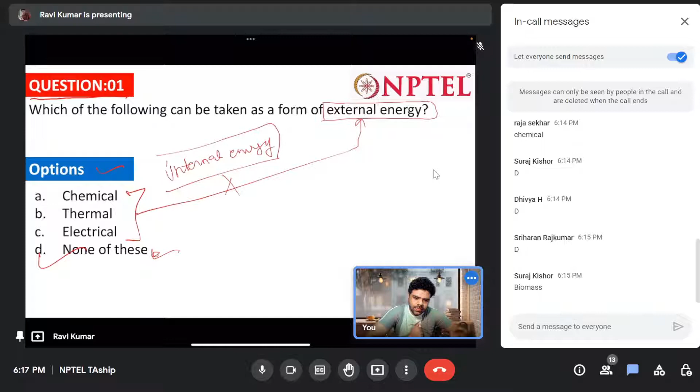Biomass. It's fine, Suraj, but biomass is not the answer. That means you have not gone through the lectures.

This is a chart: energy stored in matter. So the energy which is transferred by work action is known as external energy, and that is kinetic energy and potential energy. While on the other hand, the energy which is transferred by work, heat, or convection, that energy is known as internal energy.

And the examples of internal energy are chemical, nuclear, electrical, magnetic, internal mechanical, or thermal and bond energy. So the examples of external energy will be potential energy or kinetic energy. So the answer of this question will be D, because neither of these are examples of external energy. I think it is fine now.

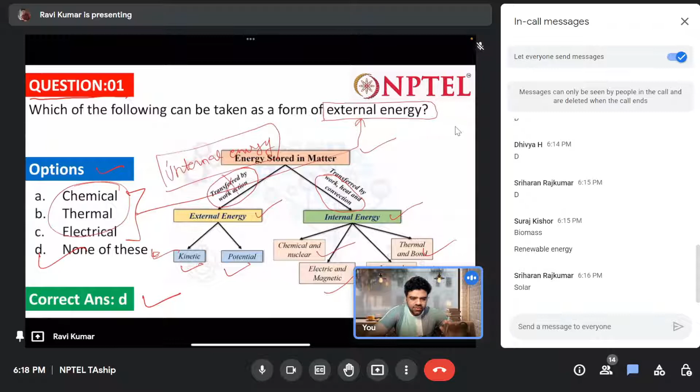This is from the week 5 lecture 1 only.

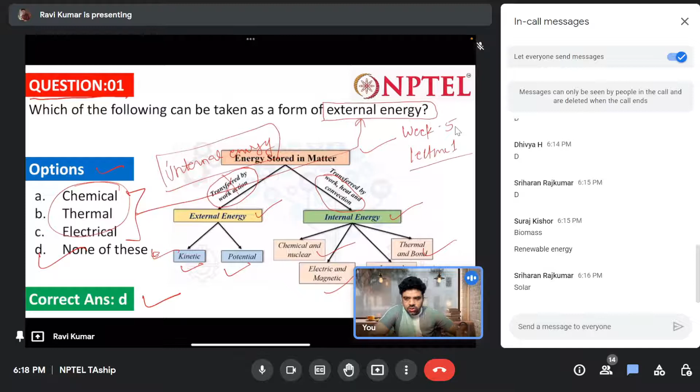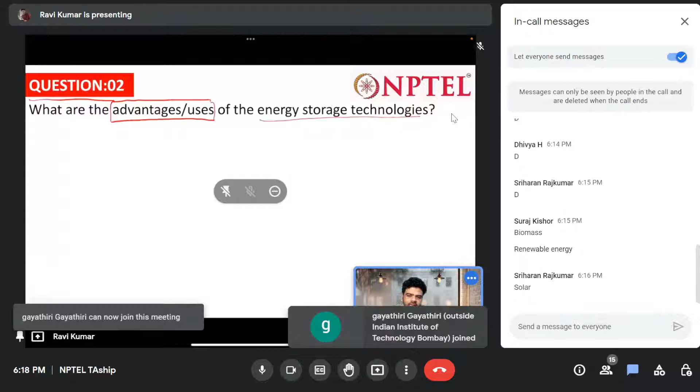So let's move to the next question. So the second question says, what are the advantages or uses of energy storage technology? You just need to tell me the advantages of energy storage technologies. These are the options: first says ensuring continuity, second says mobile technologies, third says off-grid application, and fourth option says all of the above.

I am asking advantages of energy storage technologies. Suraj says all of the above, great. Deepa says D too. Okay, the answer is all of the above.

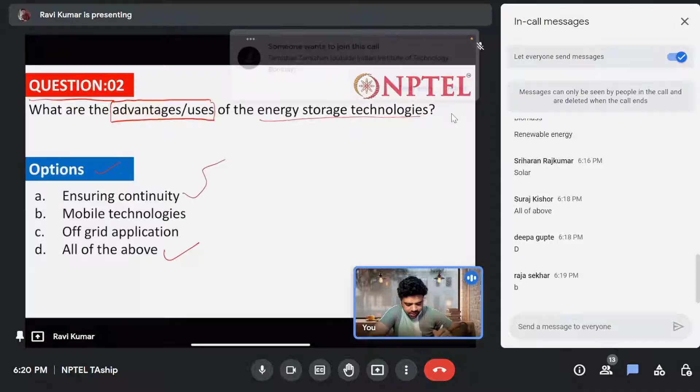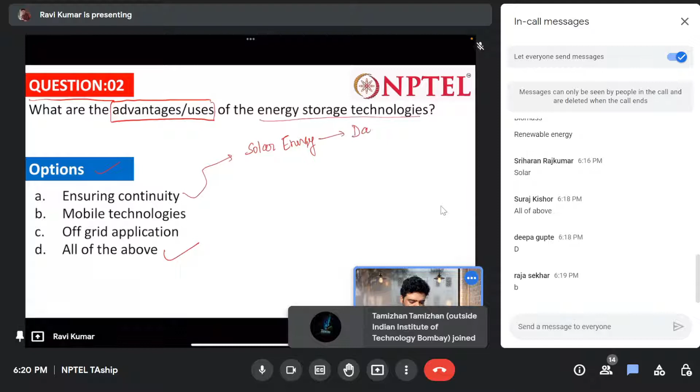But how? Let's see. Ensuring continuity: if we have solar energy, we will get it in the daytime only. So for continuity, to be used in the evening or night, what do we need? Storage. What do we do generally? We store it in batteries. So the first advantage of energy storage technology will be ensuring continuity.

Second says mobile technologies. I think you must have mobiles, laptops, wearables, watches. So these all are running on batteries. So battery is an example of energy storage technology, so yes, second option is also correct.

Third option says off-grid applications, meaning it is working even when grid is not available. Off-grid application like electric vehicle, EV. We are not connecting the wire to the electricity pole, so it is off-grid. Yes, then option C is also correct.

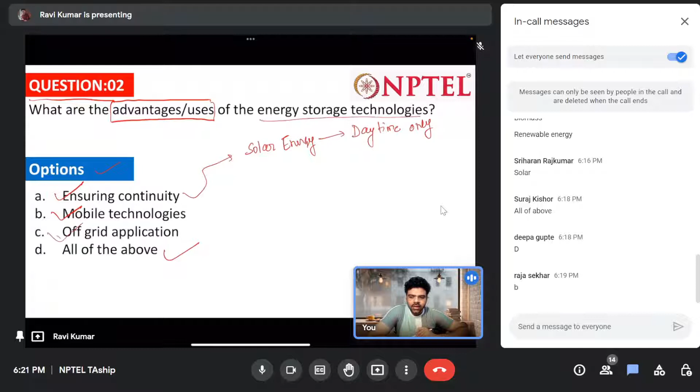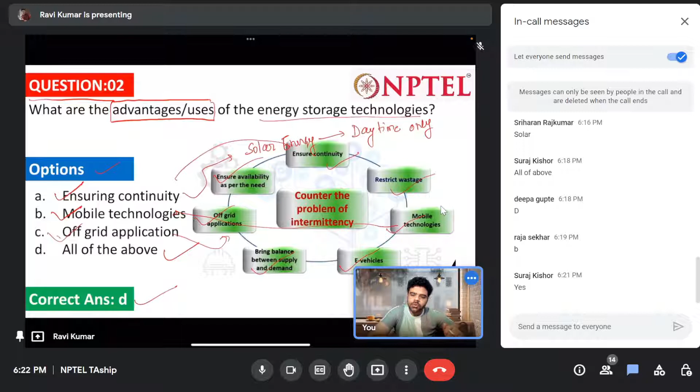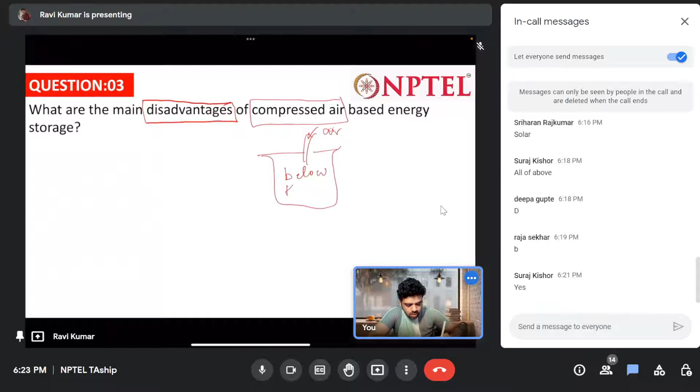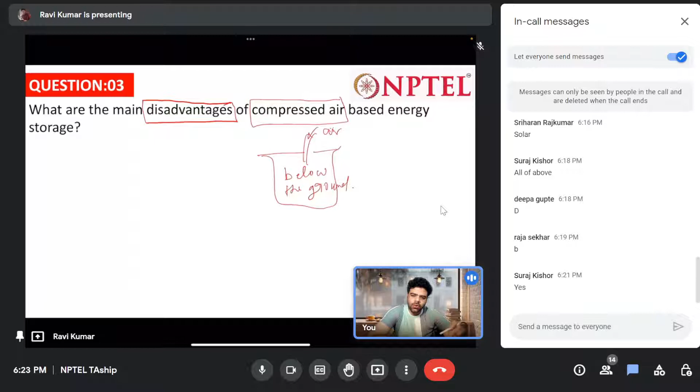That says, what are the main disadvantages of compressed air based energy storage? So first let me tell you, compressed air is a way of storing energy. What we do, we just store compressed air below the ground. So this is a way of storing energy. You just need to tell me the disadvantages due to this kind of storage technology.

These are the options in front of you. First says contamination of water. Second says storing of small amount of energy. Third says requirement of special geological formation. And D, last option, says high maintenance cost.

What are the disadvantages of using compressed air as a method for energy storage? Kishore is saying option C. Okay, here it may be two options which are correct. So Suraj is saying C. C is absolutely correct. Fatima is right, Suraj saying A, contamination of water. Absolutely correct, because we are storing this energy below the ground, so there will be groundwater, and heating of groundwater is also a kind of contamination of water.

Because if air will be compressed, it will generate heat, so contamination of water will take place, and also requirement for special geological formation. Why? Because if we are compressing air here and it is producing heat, here it may be coal present, and this coal may be burned due to this heat. That's why requirement of special geological formation is necessary. This is from the lecture only. Disadvantages: contamination of water, spontaneous combustion of coal. So yes, A and C are the correct answer.

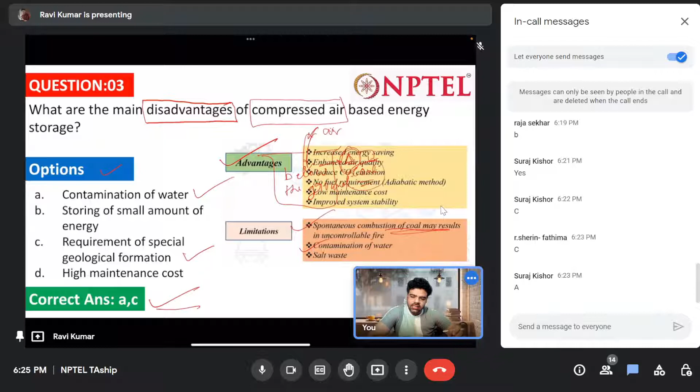Okay, let's move to the next question. That says, flywheel for energy storage generally spins at. Do you know what is a flywheel?

Anybody? Do you know? Yes, no, maybe, may not. Okay let me tell you, flywheel is a way of energy storing technology. What we do, like this is a box here, and here is a wheel of higher mass, and this is a shaft, and inside this box is vacuum.

So what we are doing, if we have some kind of energy, like electricity is there, solar PV is producing electricity, what we will do, we will just attach a motor or generator. So during the daytime, or during excess energy production, this motor will rotate this flywheel. And due to vacuum here, it won't stop due to friction or any kind of resistance, because there is no air, so it will continue in motion.

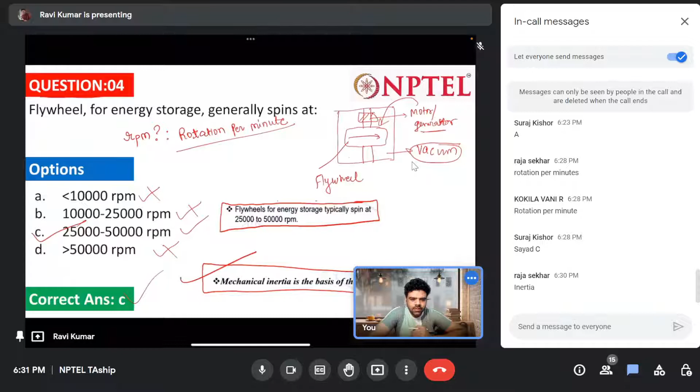I think inertia everyone knows. Okay, it's clear. Let's move to the next question.

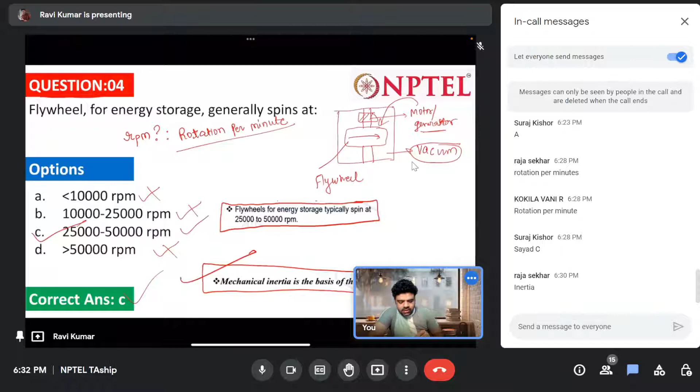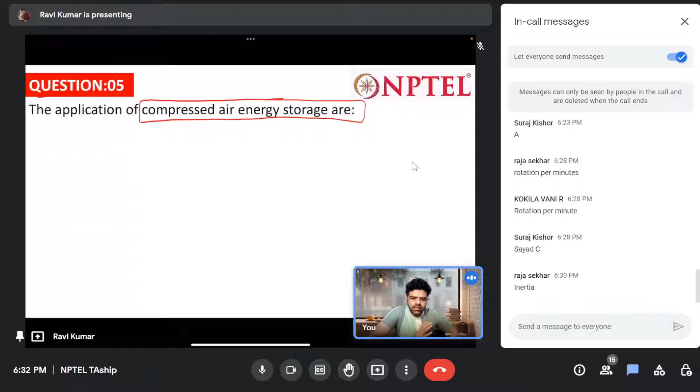So it says the application of compressed air energy storage, which I told you before, 2 slides only. What is this compressed air energy storage system? You just need to tell me the application. These are the options where this compressed air energy storage system can be used. Can it be used in power generation? Yes or no?

Suraj is saying A and B. What about others? Okay, I am assuming Suraj is right. Then tell me why not C?

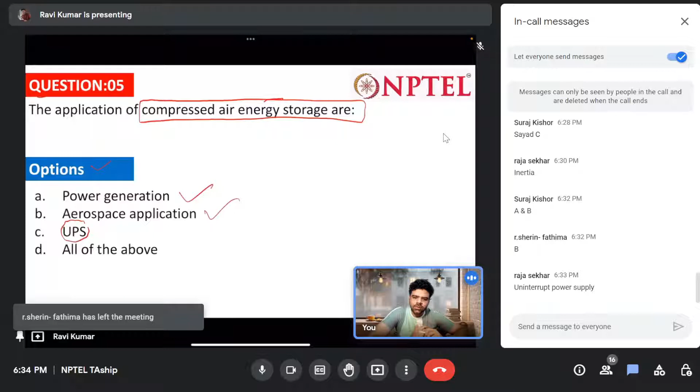But why can't we use compressed air energy storage for UPS purpose? Because switching time. Switching time for this technology is more, and in case of UPS, it should be in milliseconds. I think now everything is clear. Why not UPS? Yes, the answer will be A and B, both: aerospace and power generation.

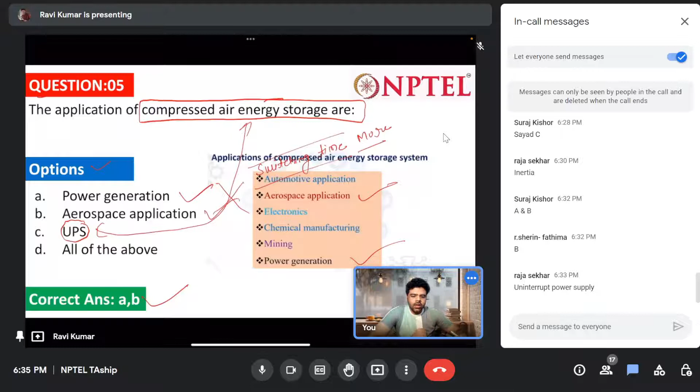Okay, let's move to the next question. Which of the following has highest round trip efficiency? Highest round trip efficiency.

What is round trip efficiency? See, if I am asking some question, and if some word is there in the question and you don't know the meaning, then you can't answer it. So if you are not understanding the question, you can ask. I will tell you.

See, I'm telling you one thing. Let's assume this is an energy storage device and we are storing energy P input, and after some time we are using this energy as P output. This is our storage. So here efficiency will be, round trip efficiency will be P out divided by P in. I think now it is fine.

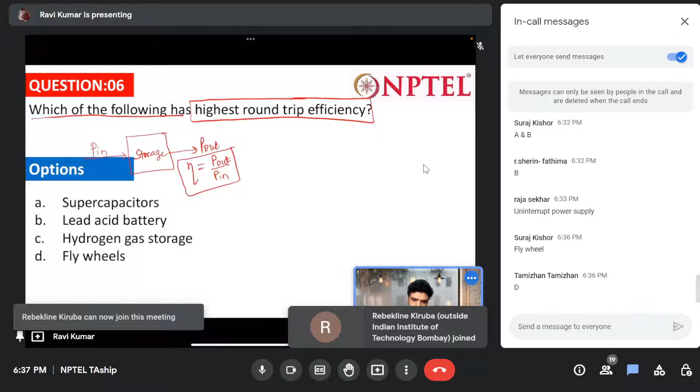Suraj saying flywheel. Tamizhan saying flywheel. Okay, so two students are saying flywheels. Raja is saying lead acid battery. One student is saying lead acid battery.

What about others? Pavan Krishna saying C, hydrogen gas storage. Okay. Shalini going with D. Deepa going with C. Fatima is also with C. It's going to be very interesting. One more for C.

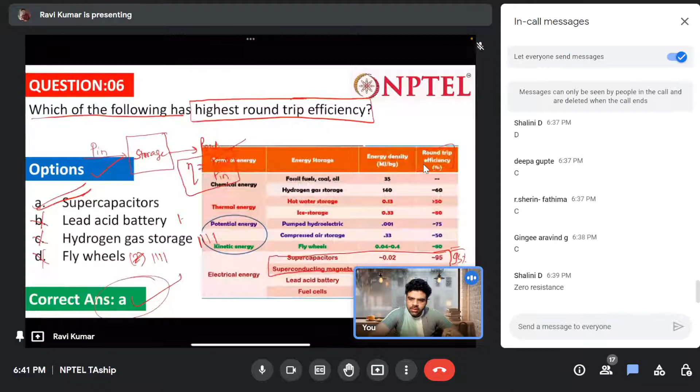Let's move to the next question. Find the amount of illumination in 1.5 sun. This illumination unit is kilowatt per meter square. So options are 0.5 kilowatt, 1 kilowatt, 1.5 or 3. You just need to tell me the amount of illumination in 1.5 sun. A, B, C or D?

Okay, two students, Pavan and Arvind ji, saying option A, 0.5. Gayatri is saying option C. Tamizhan, option A.

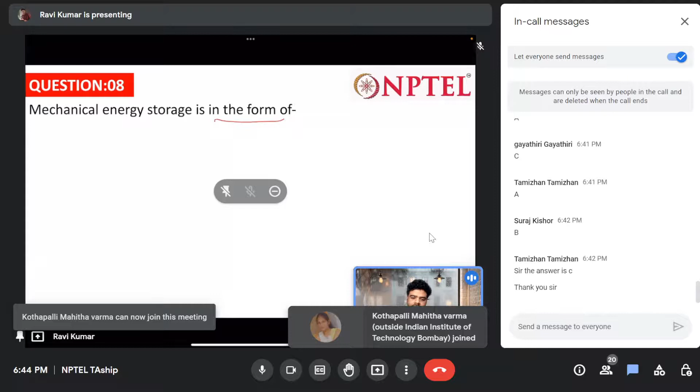So let's move to the next question, which says mechanical energy storage is in the form of: the mechanical storage is in the form of kinetic energy only, potential energy only, both, or none.

Arvind says C. Yes, Arvind, you are right. The option is C. Yes, Gayatri, answer is right. C. Mechanical will have both kinds of energy, kinetic plus potential.

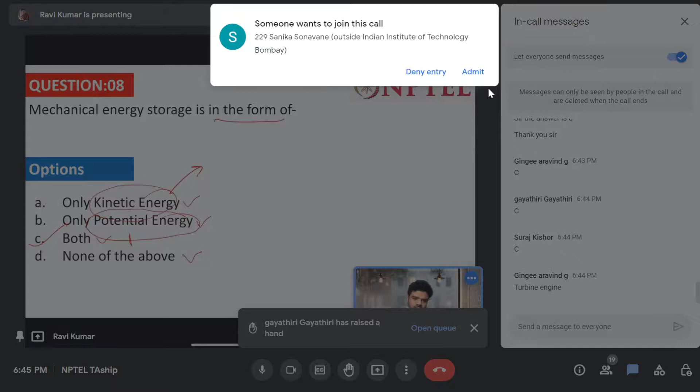Okay, so for this kinetic energy, you have seen an example. What is that? Name it. We were discussing just a few minutes ago. Turbine engine. Turbine engine is energy storage technology. Really? What is this turbine engine? What do you want to say? It's kinetic potential. Yes, Gayatri, flywheel. Flywheel is a kind of technology.

And for this potential energy, it's something related to, like Arvind is saying, turbine engine. It's kind of hydropower. Like, if this is a height h, and there is some water here, and this is a reservoir at a height h, what we will do is pump this water up to some height, so it will have some kind of potential energy, mgh. So what we have done is stored electricity in the form of potential energy. So potential energy is a form of mechanical energy. So after the unavailability of this electricity, what we can do is just open this reservoir, and here we will use our generator, and it will generate electricity back.

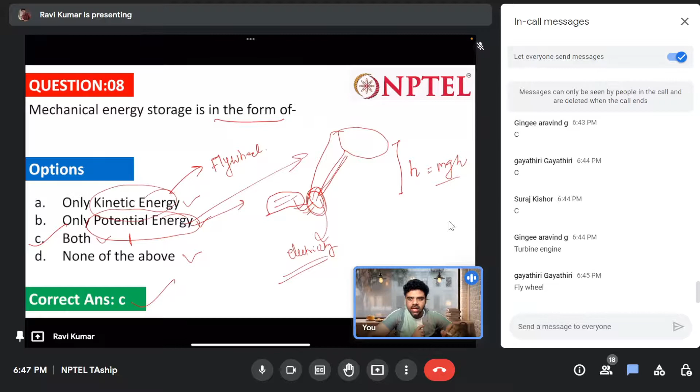Let's move to the next question, which is the second last question for today, and this one is very easy. You just need to match these: isothermal process will have constant volume, pressure, or temperature. What about adiabatic, isobaric, isochoric? It's very easy.

Kokila is saying constant temperature is isothermal. Isothermal is constant temperature, yes, so according to her, A is third. Constant pressure is isobaric, so C goes to second.

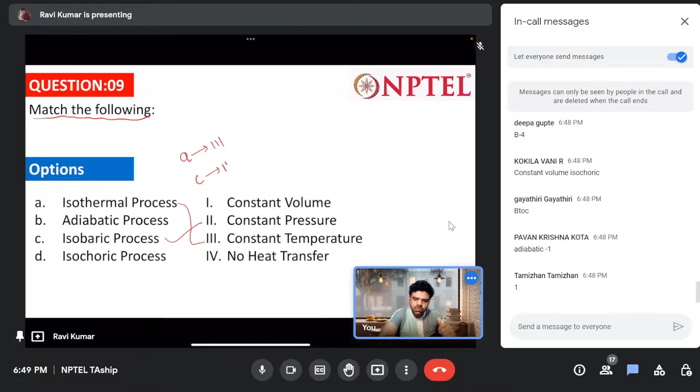What about isochoric? D, V, adiabatic 1. No, what is this 1? I'm not understanding. Tamizhan is saying only 1. So is this 1 for isochoric or adiabatic? Adiabatic means no heat transfer, yes. So B goes to the 4th and D to the first, D is constant volume, yes.

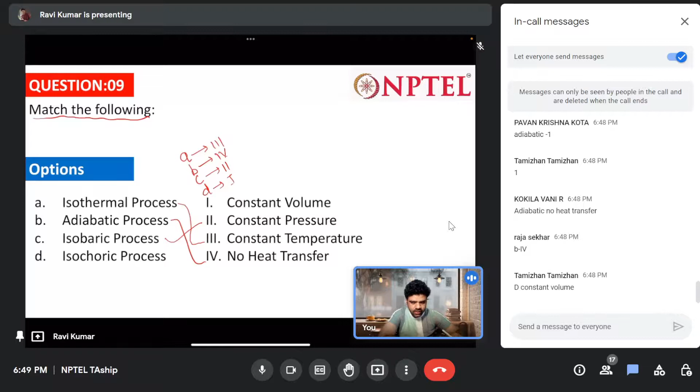So I think we have done all 4. Here also you can see isobaric, isochoric, isothermal, adiabatic. Pressure is constant for isobaric, volume is constant for isochoric, temperature is constant for isothermal, and for adiabatic there is no heat transfer.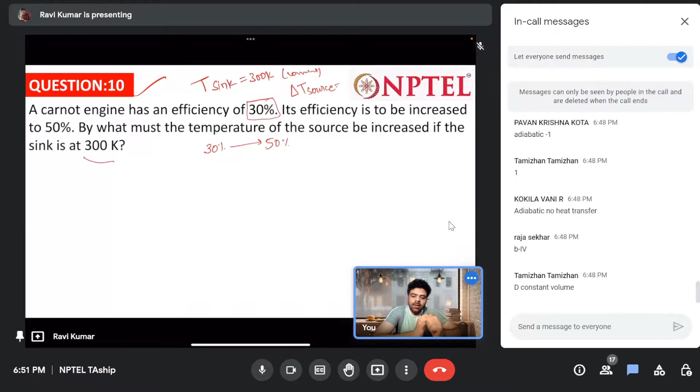If not understood, let me know. In simple language: if a Carnot engine was having 30% efficiency with sink temperature 300 Kelvin, now we need to change the temperature of the source to increase this efficiency from 30 to 50. You just need to find out how much temperature we need to increase in the source temperature.

Increase in the source temperature, you need to find out. If you want the formula, I can write it right now, but you need to solve it. Do you want me to write it, yes or no? Do you know the formula for Carnot efficiency?

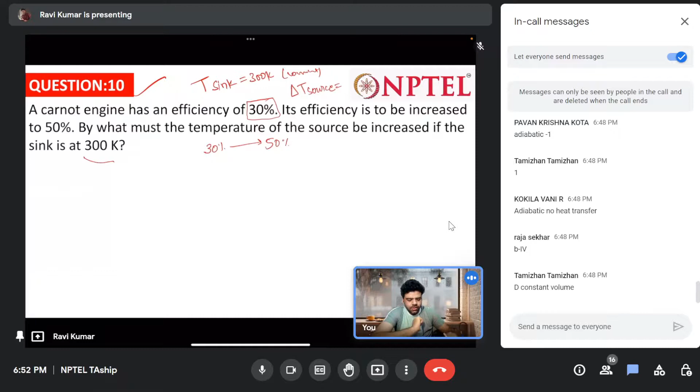Okay, let me show these options. Let me show you the formula as well. Efficiency can be given as eta equals 1 minus T sink divided by T source. Now you can solve it.

If you still have any doubt or problem, you can ask, write in the chat box. If not, then please solve it. Nobody is responding, are you solving it or not? If not, I can solve it easily, but I want you to work on it.

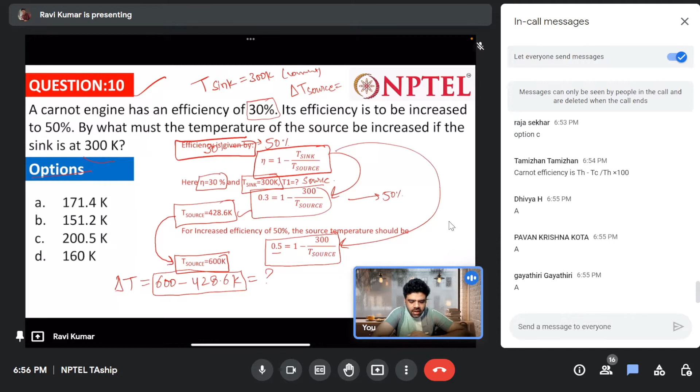And here I am asking delta T only, so it will be 600 minus 428.6 K. How much? Please just tell me the difference. Yeah, A, yes, so temperature difference is 171.4 Kelvin, so correct answer is A.